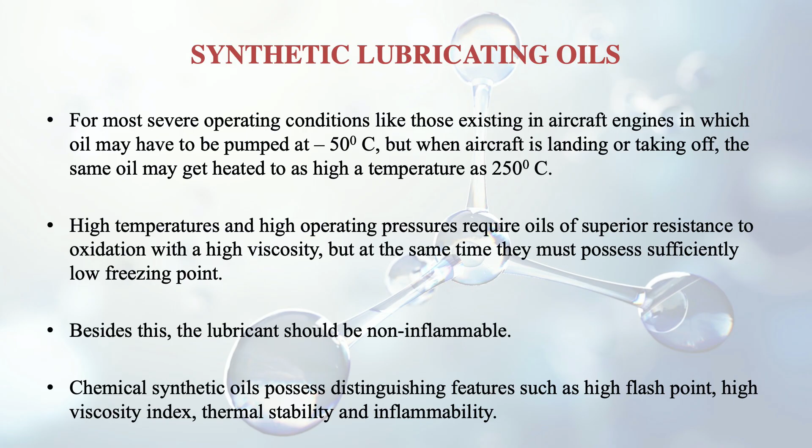And chemical synthetic oils possess distinguishing features such as high flash point, high viscosity index, thermal stability, and non-inflammability. Like I told you, it should not burn at a very low temperature; the flash point should be at least above 250 degrees centigrade. That's why high flash point is given here.

Then come the greases, or the semi-solid type of lubricants. Till now we discussed the liquid type; now we discuss the semi-solid, which was the second category according to the physical state. Lubricating grease is semi-solid, consisting of soap dispersed throughout a liquid lubricating oil. The liquid lubricant may be petroleum oil or even a synthetic oil, and it may contain any of the additives for specific requirements.

Greases are prepared by saponification of fat with alkali. Saponification is a process where we use the fat and the oil to make soap-like things. This is followed by adding hot lubricating oil while under agitation. This way grease is prepared, and the total amount of mineral oil added determines the consistency of the finished grease. So according to the consistency we need, we add the mineral oil.

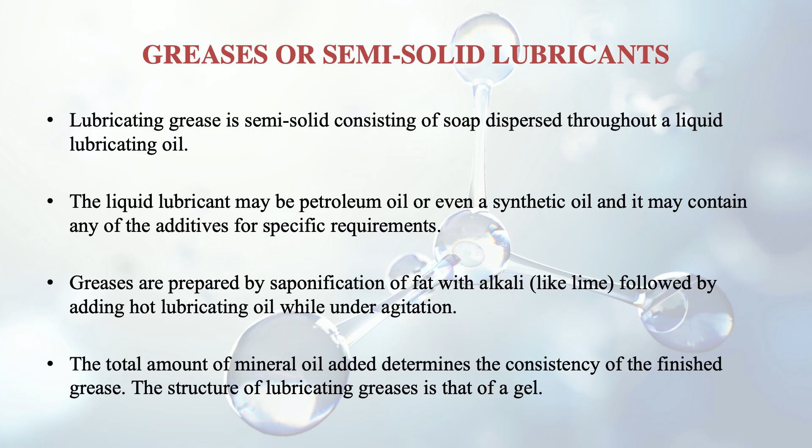The structure of lubricating greases is like that of a gel. You may be using gels in many places, like toothpaste and shaving cream. Soaps are actually gelling agents which give an interconnected structure containing the added oil. At high temperatures, the soap dissolves in the oil, whereupon the interconnected structures cease to exist and the grease will liquefy. So its property of providing semi-solid lubrication will go away.

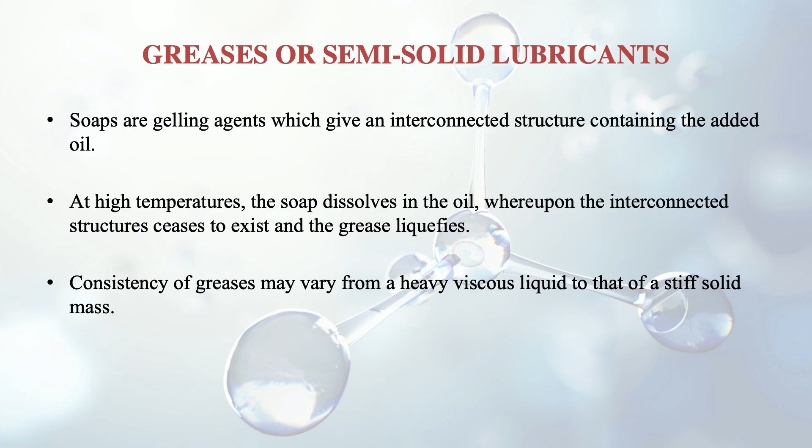Consistency of greases may vary from a heavy viscous liquid to that of a stiff solid mass. They may become solid at some point, and completely liquid at some point, so that consistency varies. To improve the heat resistance of grease, inorganic solid thickening agents are added. So again, additives are always there which can improve the property as per our need.

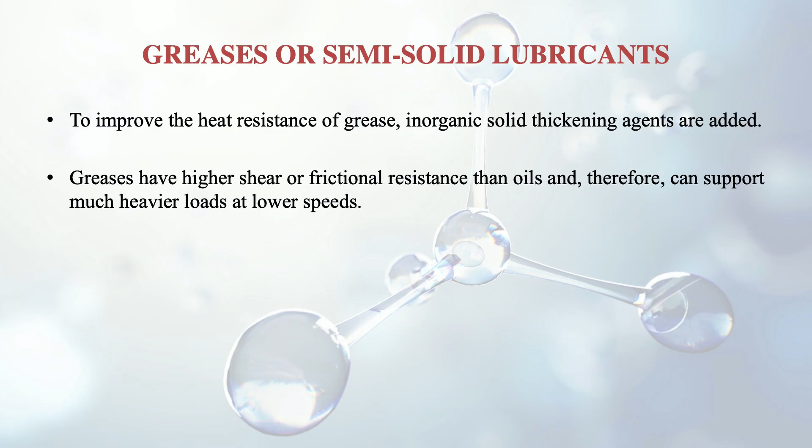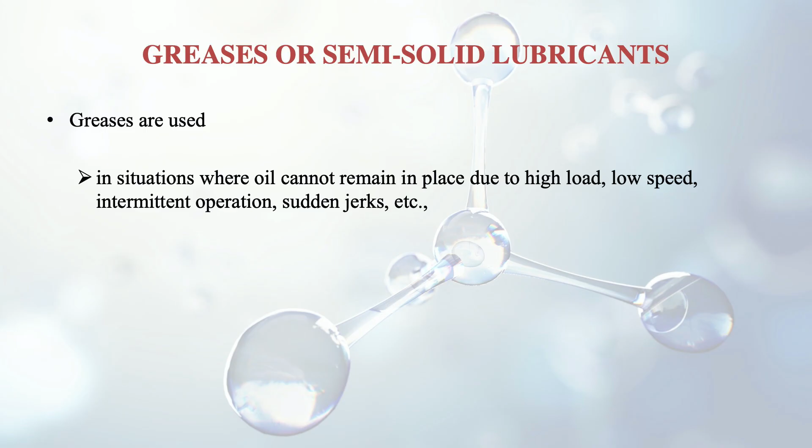Greases have higher shear or frictional resistance than oils, and therefore can support much heavier loads at lower speeds. This is a very good property of grease. They are used in situations where oil cannot remain in place due to high load, low speed, intermittent operation or sudden jerks, and in bearings and gears working at high temperature.

Also in situations where a bearing needs to be sealed against entry of dust, dirt, grit or moisture, because greases are less liable to contamination by these. And finally, in situations where dripping or spurting of oil is undesirable, because oil may cause contamination, we use grease, because unlike oils, grease does not splash or drip over articles being prepared by the machine.

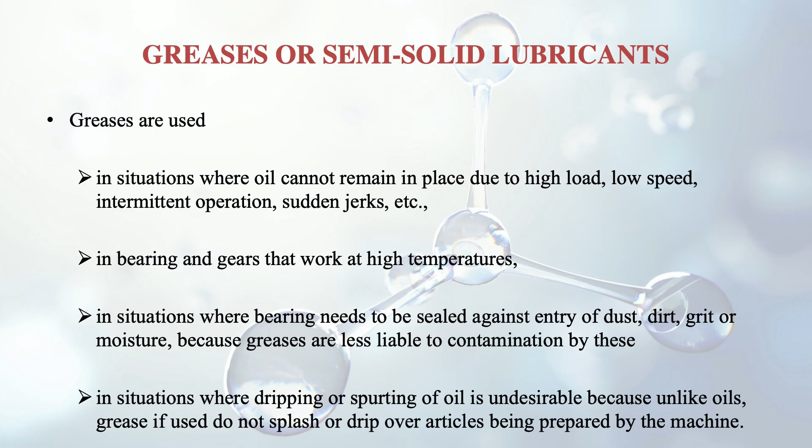So what are the soap functions? We have discussed about soap. So what are its functions actually? The main function is to act as a thickening agent, so that grease sticks firmly to the metal surfaces. That's what its function is. However, the nature of soaps decides three things: the temperature up to which the grease can be used, the consistency of the grease, and finally the water and oxidation resistance is also determined by these soaps.

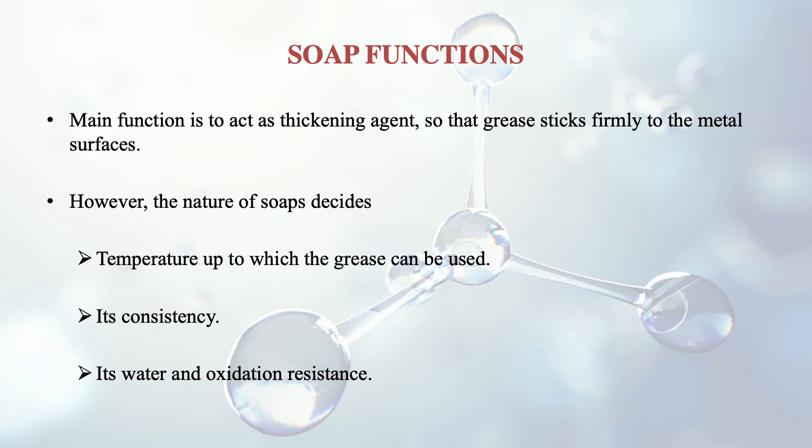So there are certain important greases we will discuss here. The first is the calcium based grease, which is an emulsion of petroleum oils with calcium soaps. How is it prepared? We add the requisite amount of calcium hydroxide, that is Ca(OH)2, to a hot oil like tallow while under agitation. So this is the process of preparation.

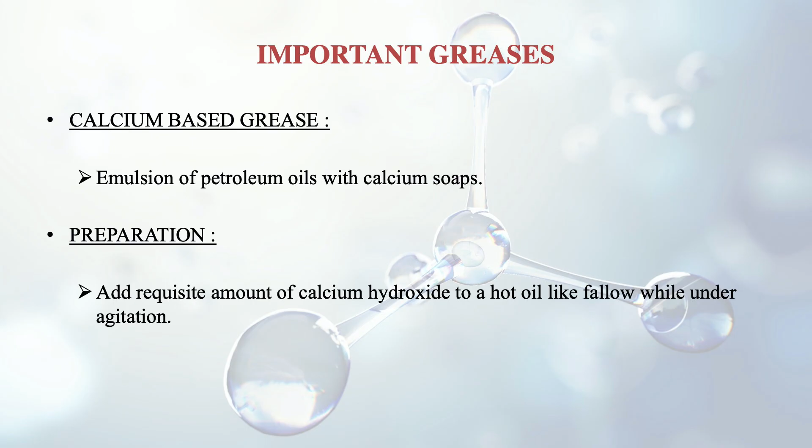And what are its properties and applications? These greases are very cheap and very commonly used, and they are insoluble in water. They are satisfactory for use only at low temperatures, because above 80 degrees centigrade the oil and soap begin to separate out, so then we cannot use them.

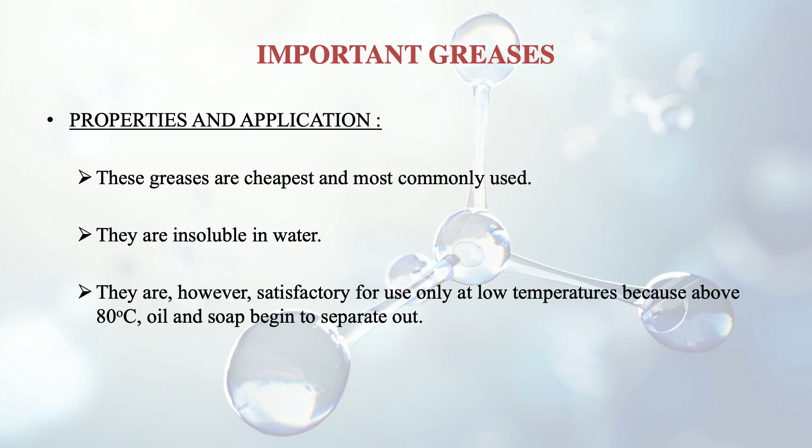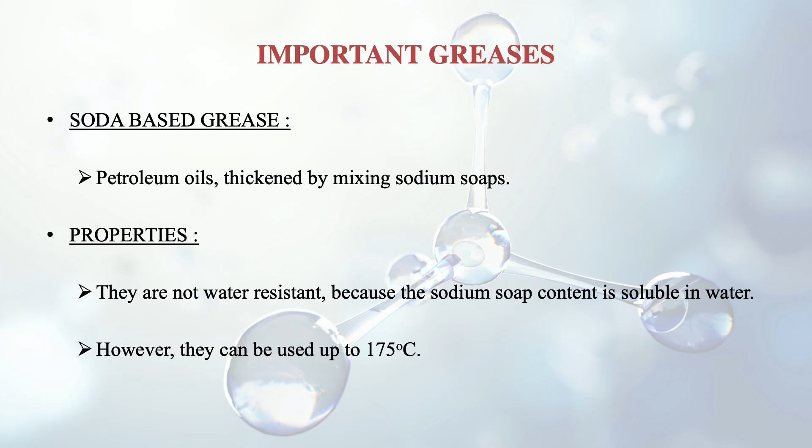Then there is the soda based type of grease, which comprises petroleum oils thickened by mixing sodium soaps. What are the properties of these? They are not water resistant, because the sodium soap content is soluble in water, so we cannot use it for water resistant purposes. But it can be used up to very high temperatures like 175 degrees centigrade, so it can be used in high temperature applications, like in ball bearings, where the lubricant gets heated due to friction, because it can withstand high temperature.

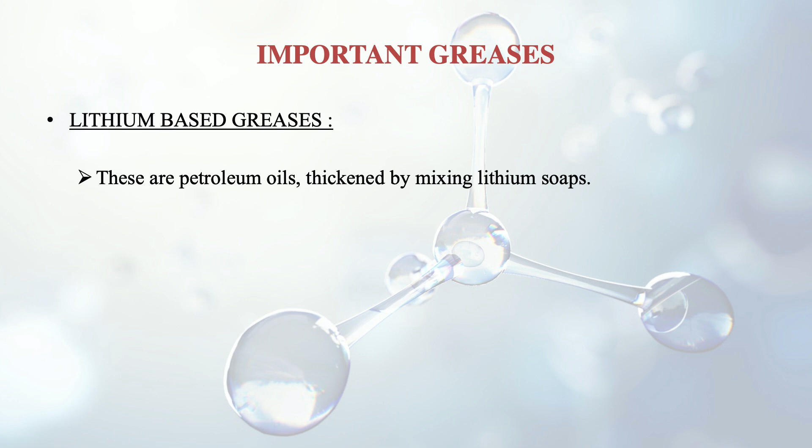Then there are lithium based greases also, which are petroleum oils thickened by mixing lithium soaps, and they are water resistant. The earlier one was not water resistant; this lithium based one is, and it is suitable for use at low temperatures up to 15 degrees centigrade.

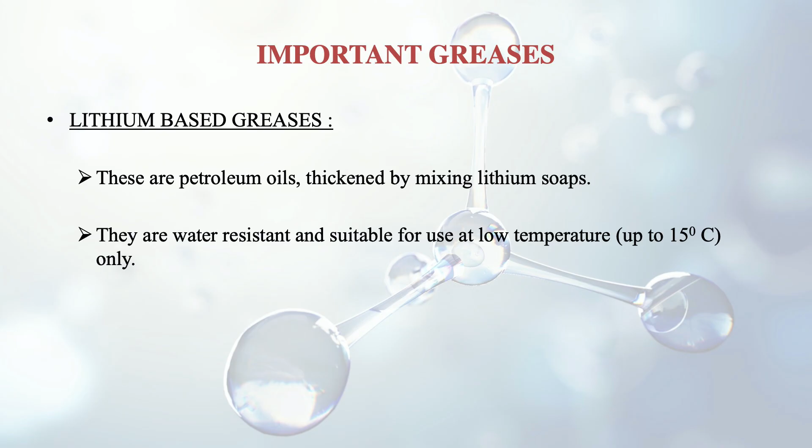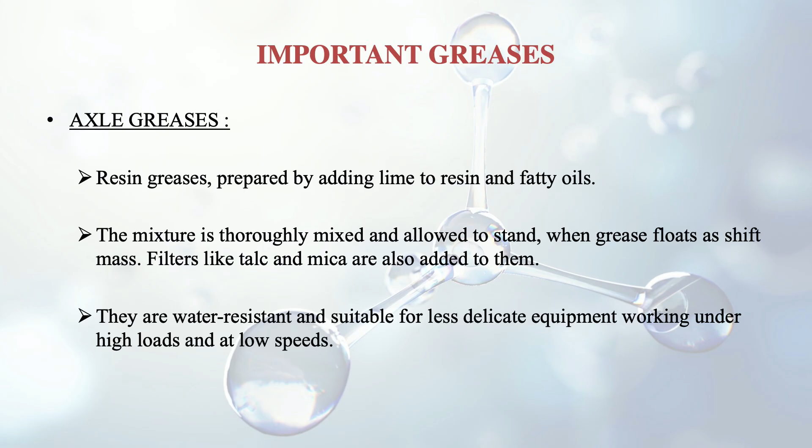Then there are the axle greases. Axles, you know, are there in vehicles. These are resin greases prepared by adding lime to resin and fatty oils. The mixture is thoroughly mixed and allowed to stand. When grease floats as a stiff mass, fillers like talc and mica are also added to them. These axle greases are water resistant and suitable for less delicate equipment working under high loads and at low speeds. So after discussing the semi-solid type of lubricants, we move on to the solid type.

Till now we have discussed the liquid type and the semi-solid type. So what are solid lubricants? They are employed in certain operating conditions where a lubricating film cannot be secured by use of lubricating oils or greases. Also in places where contamination by lubricating oils or grease is unacceptable. Then where the operating temperature or load is too high even for a semi-solid lubricant to remain in position, so that it cannot maintain its consistency, we have to go for solid lubricants.

And finally, where combustible lubricants have to be avoided, we have to use this type of solid lubricant, because generally the liquid and semi-solid types are more prone to catching fire.

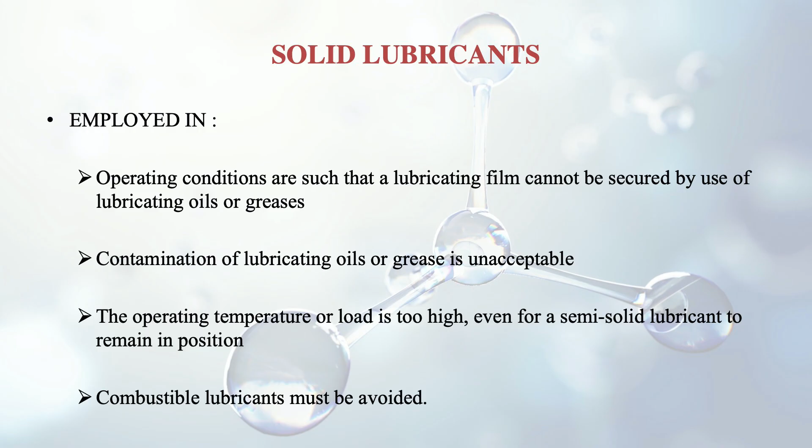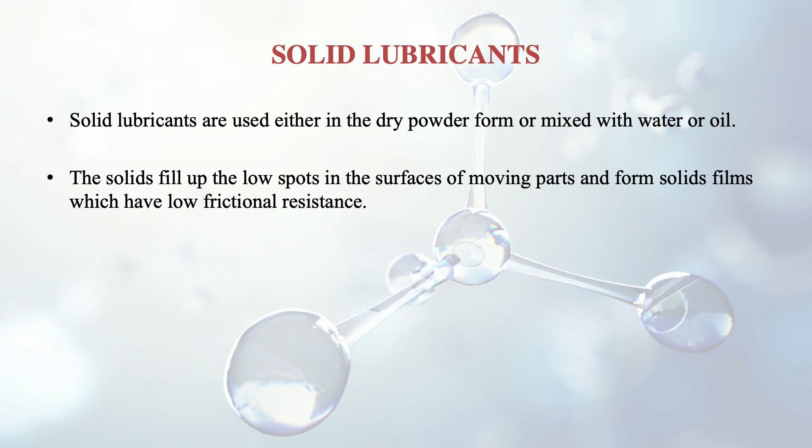Solid lubricants are used either in dry powder form or mixed with water or oil. The solids fill up the low spots in the surfaces of the moving parts. Like we discussed earlier, there are valleys or low spots, so these fill that portion and form solid films which have low frictional resistance. The usual coefficient of friction of solid lubricants is between 0.005 to 0.01, so it is quite low here also. The two most usual solid lubricants employed are graphite and molybdenum disulfide.

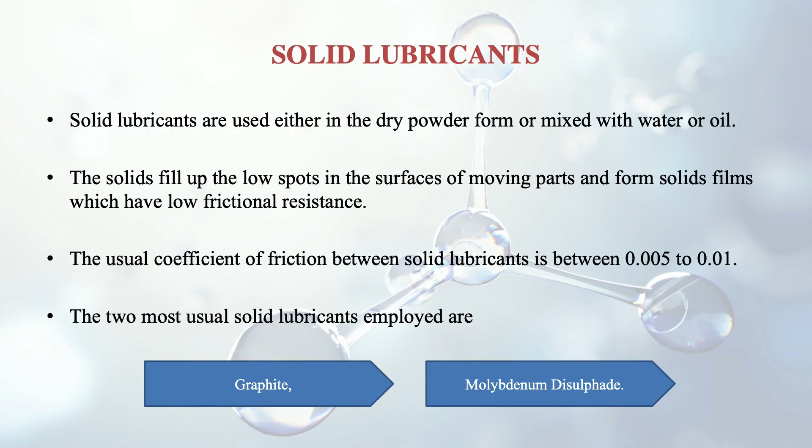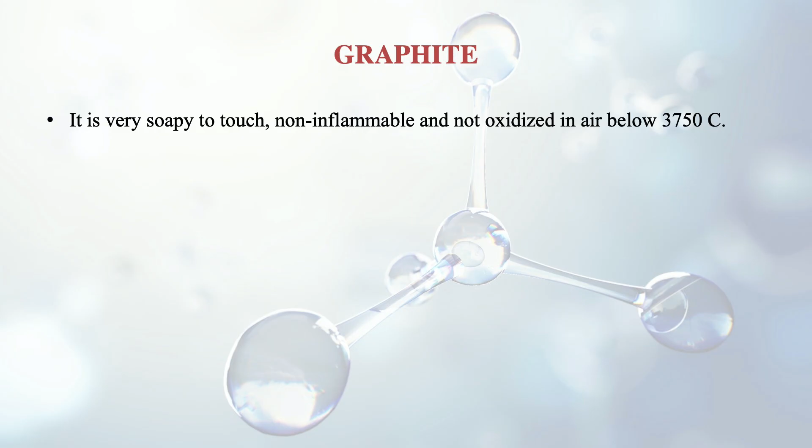So we now discuss graphite. We have seen graphite when discussing iron and steel, and how it was helpful there; it is generally in the form of flakes. It is very soapy to touch, it is non-inflammable and is not oxidized in air up to a temperature of 375 degrees centigrade. In the absence of air, it can be used up to much higher temperatures, beyond 375 degrees centigrade, so it is good for high temperature applications.

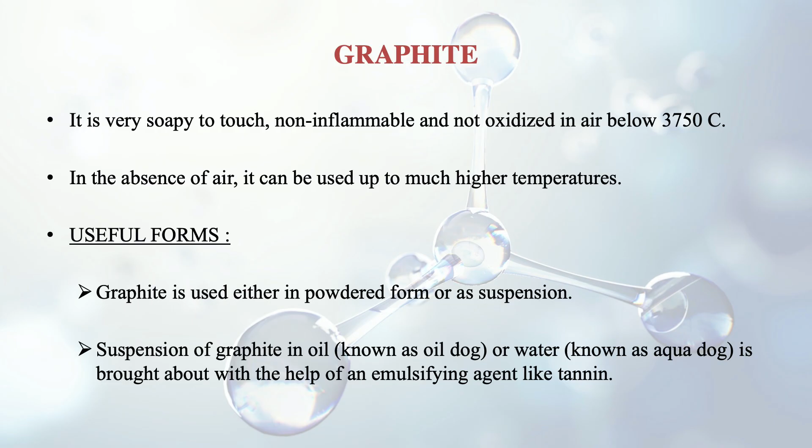And what are the useful forms of graphite? Graphite is used either in powdered form or as a suspension. A suspension of graphite in oil is known as oildag, whereas a suspension of graphite in water is known as aquadag, made using an emulsifying agent like tannin. Oildag is particularly useful in internal combustion engines because it forms a film between the piston rings and the cylinder, giving a tight fit contact and thereby increasing compression.

And the aquadag one is useful where a lubricant free from oil is needed. Suppose there is a certain situation, like in the case of our foodstuffs, where we cannot have certain oil which is not good for health if we consume it. Then we don't need that oil, so in that case we will have to use the water-based one, that is the aquadag. So what are the uses of graphite then? They are generally used in air compressors and lathes.

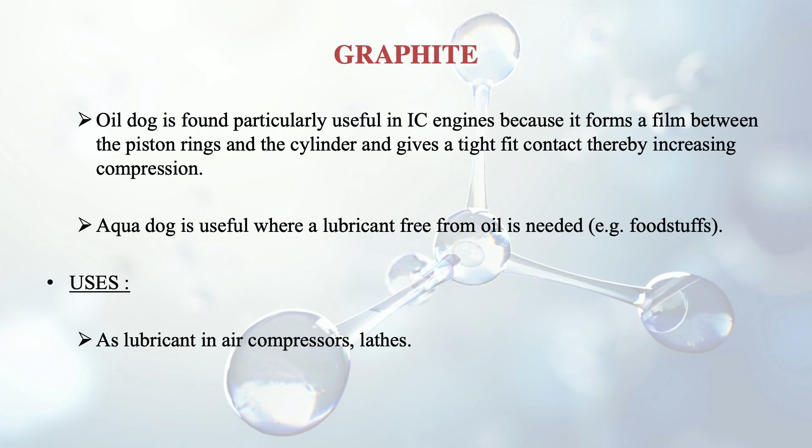And the second one is molybdenum disulfide. These possess a very low coefficient of friction, and they are stable in air up to 400 degrees centigrade. So they are even better than graphite if we take the case of temperature. In air they can sustain up to 400 degrees centigrade.

Its fine powder may be sprinkled on surfaces sliding at high velocities, where it fills low spots in metal surfaces, forming a thin film. So this is the same type of process as graphite, and it is also used along with solvents and in greases. Besides graphite and molybdenum disulfide, there are other substances like soapstone, talc, mica, etc., and these can be used as solid lubricants.

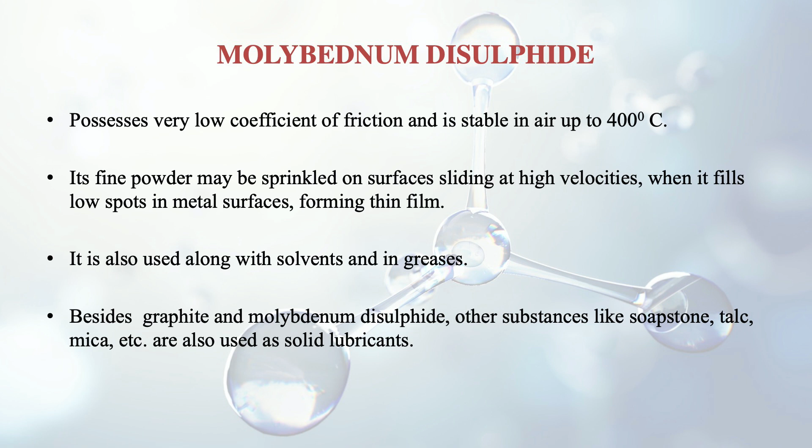So now we discuss the general properties of lubricants. The first one is viscosity. And what is viscosity actually? Viscosity of a fluid is the property which resists its flow or shear. So if a certain fluid is moving, the resistance between the layers of that fluid is known as viscosity. It is the resistance to the motion of the fluid.

The quantitative measure of this property is given in terms of the dynamic or absolute viscosity. Absolute viscosity is defined as the force required to shear a layer of unit thickness at unit velocity, and its unit is poise, and there is also centipoise. And the ratio of absolute viscosity to density of oil is called the kinematic viscosity. So kinematic viscosity deals with the internal resistance.

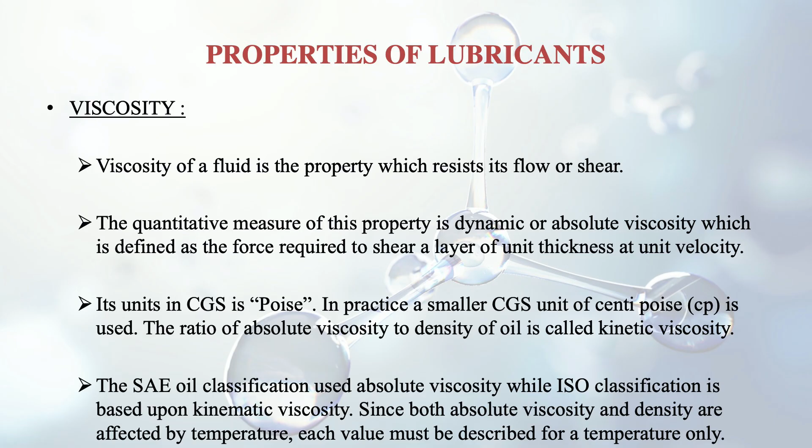There is the SAE, the body which deals with fluids and lubricants. SAE oil classification uses the absolute viscosity, while ISO classification uses the kinematic viscosity. Since both absolute viscosity and density are affected by temperature, each value must be described for a certain temperature only, because they change with temperature.

And then what is volatility? This is also a property of lubricant. Volatility of a lubricant is its tendency to go into the vapor phase, how quickly or slowly it can go into the vapor phase. It is very important in cases where lubricant is used in the form of thin films, as in boundary lubrication, because if it goes into vapor very quickly, there may be nothing between the contacting surfaces. An example is rolling contact bearings.

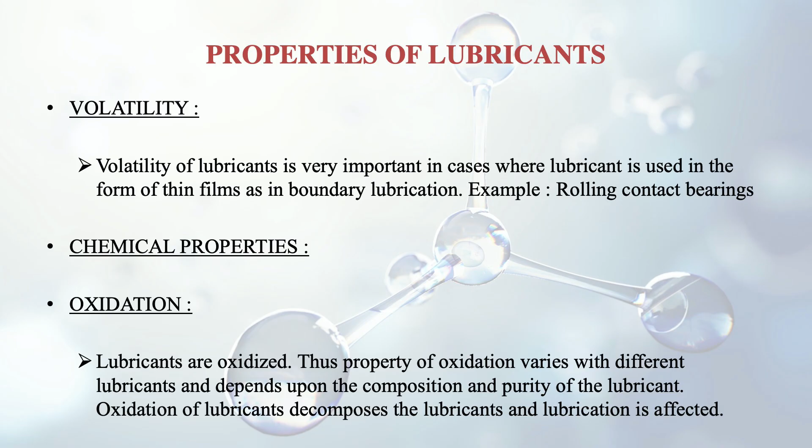Then there are chemical properties of lubricants, like oxidation. Lubricants are oxidized, and the property of oxidation varies with different lubricants, depending upon the composition and purity of the lubricant. Oxidation decomposes the lubricants and lubrication is affected, so this one is very important. Then there is hydrolysis, a chemical reaction by which various types of lubricants are decomposed. Examples are the esters.

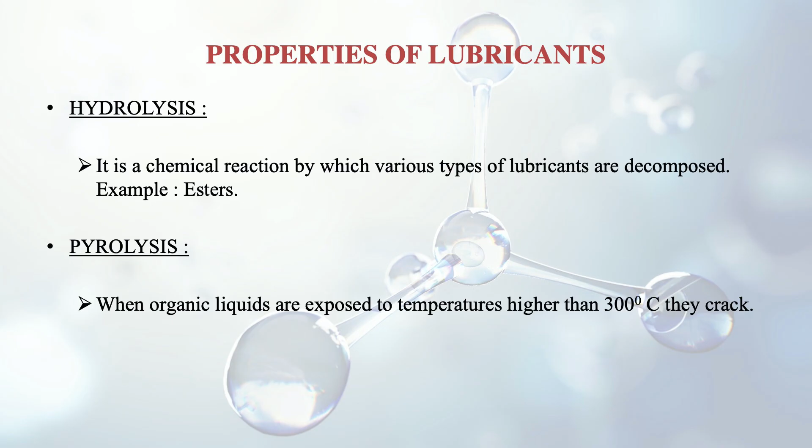Then pyrolysis. When organic liquids are exposed to temperatures higher than 300 degrees centigrade, they tend to crack, and this phenomenon is known as pyrolysis. The rate of cracking differs with different compounds depending upon their composition. It has been found that cracking is generally a free radical chain reaction and is generally accelerated by oxidation. So lubricants used should not crack under lubrication, and we have to see that oxidation doesn't take place, because it will lead to cracking.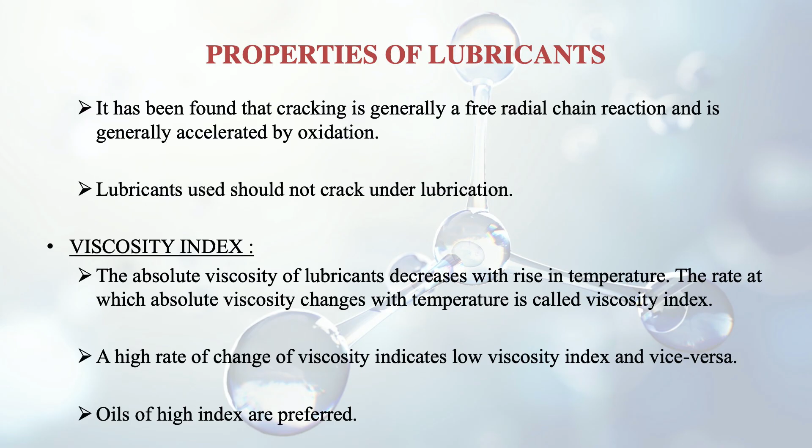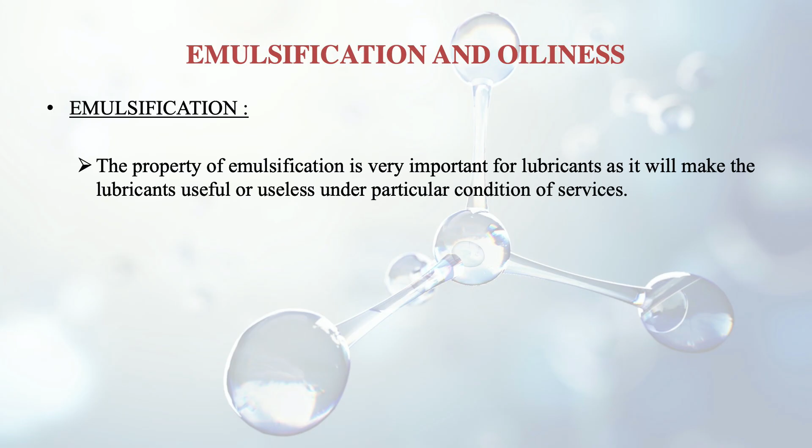Then we come to the phenomena of emulsification and oiliness. So emulsification is the property which is important for lubricants, as it will make the lubricants useful or useless under particular conditions of service. For example, in case of steam turbines, it is necessary that the emulsion formed by the lubricant with water should separate very quickly and easily.

And what is oiliness? Vegetable oils have oiliness, like we discussed earlier, while mineral oils are very low in this property. In order to improve the oiliness of the mineral oils, additives such as vegetable oils and fatty acids like oleic and stearic acids are added, which we have seen earlier as well.

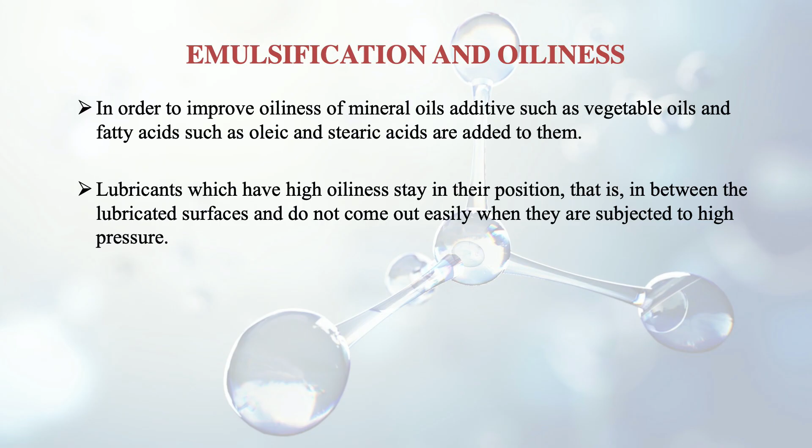And lubricants which have high oiliness actually stay in their position, that is in between the lubricated surfaces, and they do not come out easily when they are subjected to high pressure. So that's why the oiliness property is important. So after discussing these properties, we move on to the cutting fluids now. What good or bad things, advantages or disadvantages, they bring in.

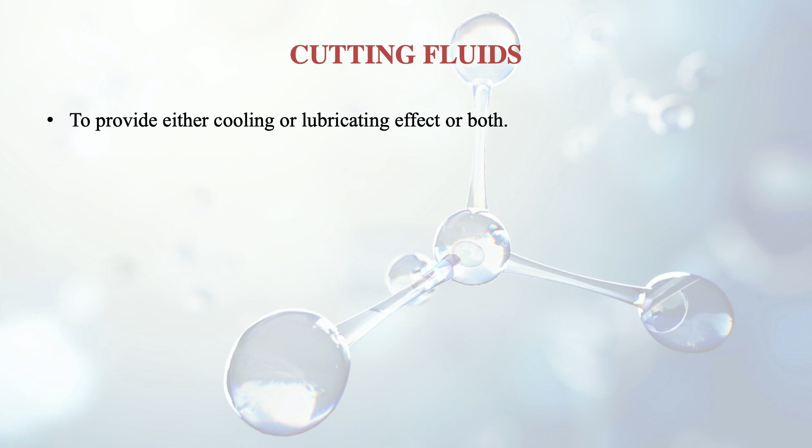These cutting fluids are used to provide either cooling or lubricating effect, or both. That's why cutting fluids are used. And what are their properties? They have good lubrication, low viscosity, so that the lubricant can easily fill in the cracks formed on the workpiece. Then they are chemically stable and non-corrosive towards the metals of the workpiece as well as the tool, and they have high thermal conductivity.

So localized heating will not occur because they have high thermal conductivity. What is the use of this oil as a cutting fluid? How does it fare? For low speed and high pressure, this oil can be used as cutting fluid. And compounded oils obtained by mixing petroleum oils with vegetable and animal oils are also used for such purposes.

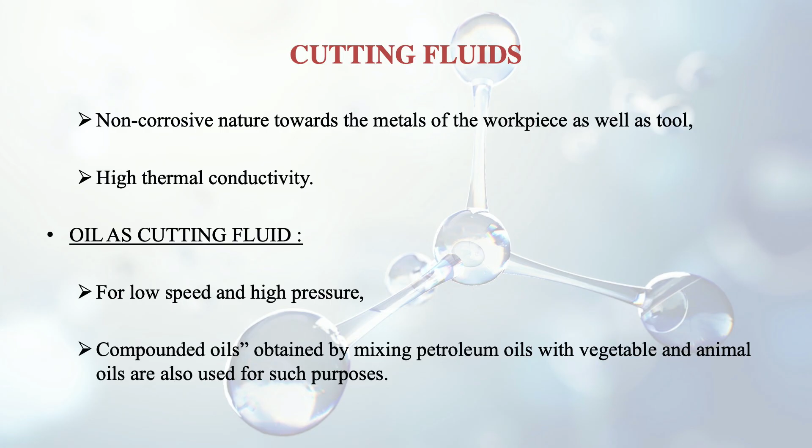Then what about water as a cutting fluid? It is mainly used for the cooling purpose. What about an emulsion as a cutting fluid? In most cases both a cooling agent and a lubricant are needed simultaneously. We need oiliness as well as the cooling effect, so that the portion is not heated up beyond limits. For such situations, oil-water emulsion is employed. So we mix the two, oil and water.

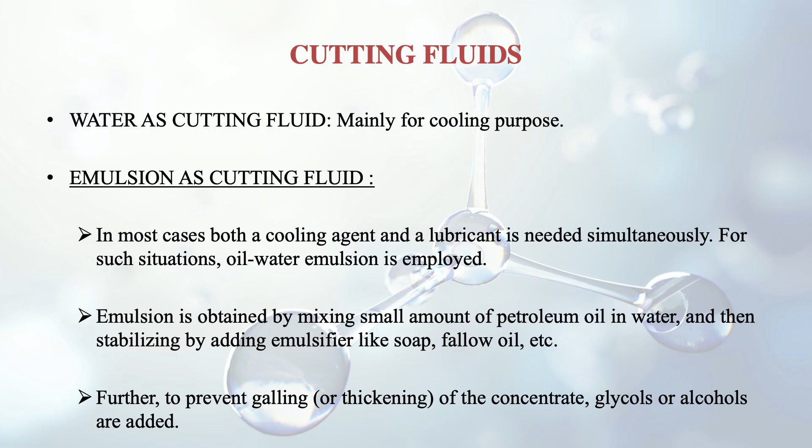Emulsion is obtained by mixing a small amount of petroleum oil in water, and then we stabilize it by adding an emulsifier like soap, tallow oil, etc. Further, to prevent galling, that is thickening of the concentrate, glycols or alcohols, compounds having OH bonds, are added. Besides this, certain germicides are also added to prevent germs from attacking the emulsion. Sodium nitrate is one of the germicides.

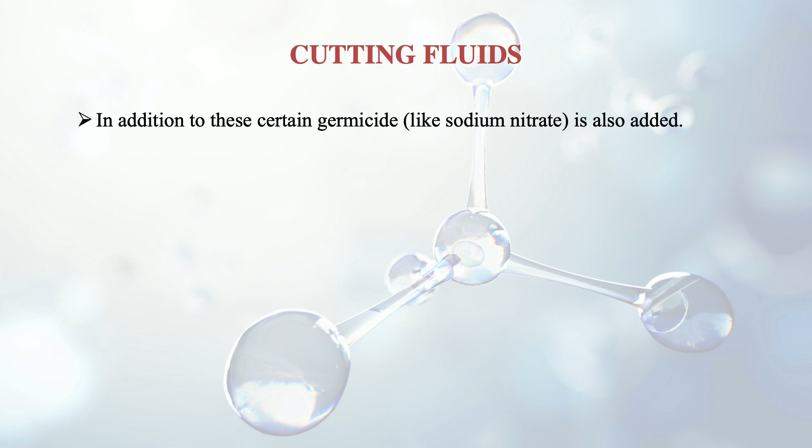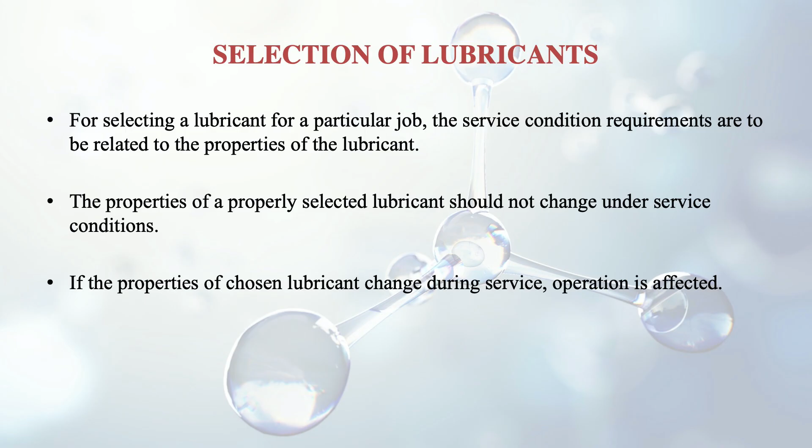Now, how do we select lubricants? For selecting a lubricant for a particular job, the service condition requirements are to be related to the properties of the lubricant. The properties of a properly selected lubricant should not change under service conditions. If the properties of the chosen lubricant change during service, then operation will obviously be affected.

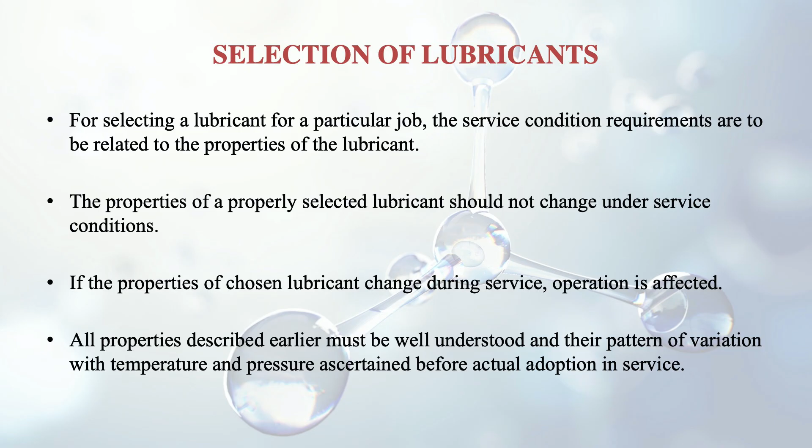So all properties described in this session must be well understood, and their pattern of variation with temperature and pressure should be ascertained before actual adoption in service, because there is a high temperature range and quite a variation in pressure also. So we need lubricants which can hold their own at different temperatures and pressures.

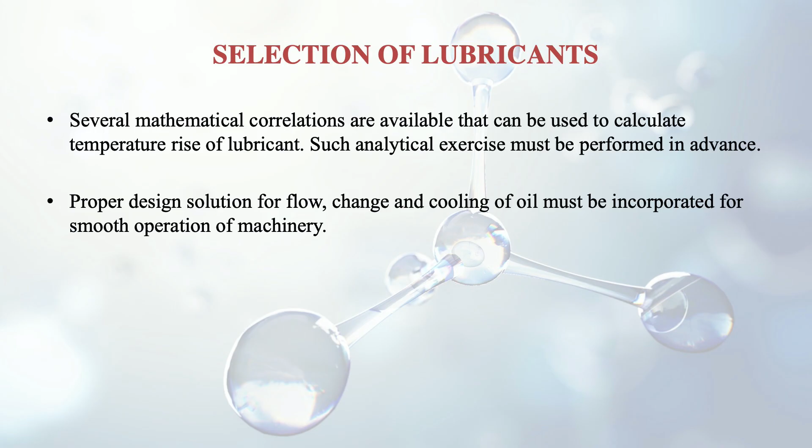Several mathematical correlations are available that can be used to calculate the temperature rise of the lubricant. Such analytical exercise must be performed in advance. And finally, proper design solutions for flow change and cooling of oil must be incorporated for smooth operation of machinery.

So in this session we discussed the various kinds of lubricants, like the semi-solid and solid types of lubricants. In addition, we saw what emulsification is and various other things, and finally we got to know how to select lubricating oils.